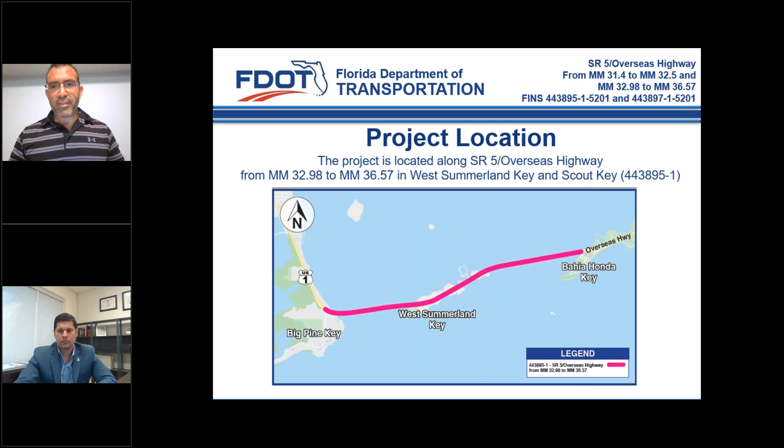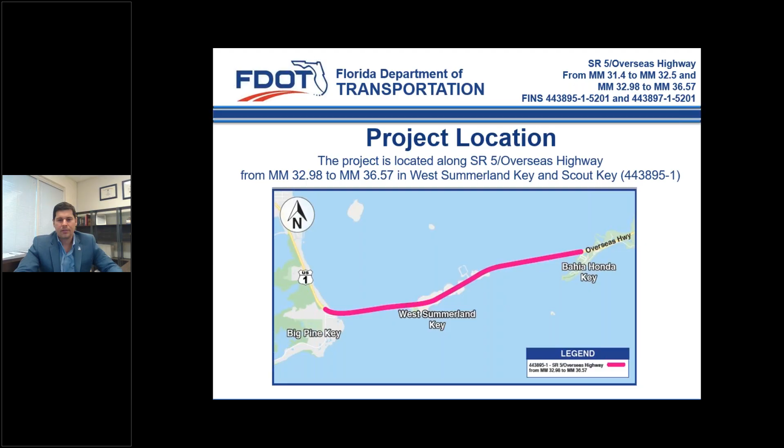As Rodolfo mentioned, this project is along State Road 5, Overseas Highway, from mile marker 32.98 to mile marker 36.57, and is located within West Summerland Key and Scout Key. The project length is 3.4 miles and is composed of 1.9 miles of bridge section and 1.5 miles of roadway section. The Florida Department of Transportation has a duty to prolong the lifespan of the pavement and provide a safe sidewalk path and accessibility for the public.

For this reason, the department is performing a resurfacing, restoration, and rehabilitation project. This project is within Monroe County. As you can see in this slide, it shows a project schedule and the cost.

The production date for the plans is scheduled for September 2021. The letting date is scheduled for February 2022. The construction start is scheduled for June 2022, and it will last 1 year. As a result, the construction will end on June 2023, and the total construction cost is $3.6 million.

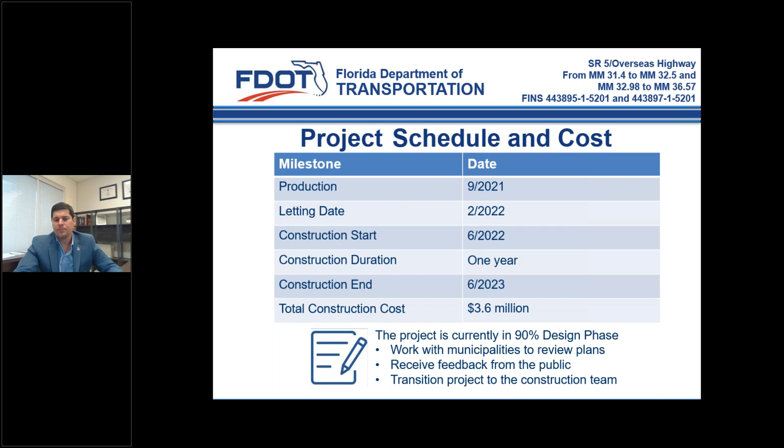As of today, the project is currently at 90% design phase, and we are working closely with the municipalities as well as with FDEP for the Florida Keys Trail, the Heritage Trail, and we're open to receive any feedback from the public. In regards to the scope, the project scope includes the milling and resurfacing of the existing corridor.

We're also going to be upgrading substandard pedestrian ramps and crosswalk markings at mid-block crossings at the boat ramp entrance, which is just east of the Spanish Harbor Channel. We're going to be upgrading substandard guardrail, restoring eroded roadside areas and shoulder drop-offs, installing pedestrian and bicycle bullet railing at the bridge segments, and finally, upgrading pavement markings and substandard signs as per current standards.

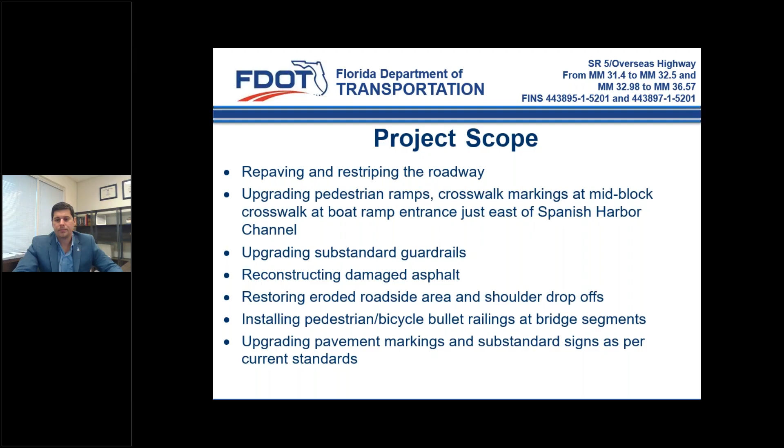What to expect? Well, first of all, there are going to be lane closures. The lane closures are only going to occur during non-peak hours and on non-event days, nights, and weekends. The non-peak hours are for the 4-lane sections between 9 a.m. to 4 p.m. Monday through Friday, and between 9 p.m. to 6 a.m. Sunday through Thursday. The non-peak hours for the 2-lane section are 9:30 p.m. to 5 a.m. Sunday through Thursday.

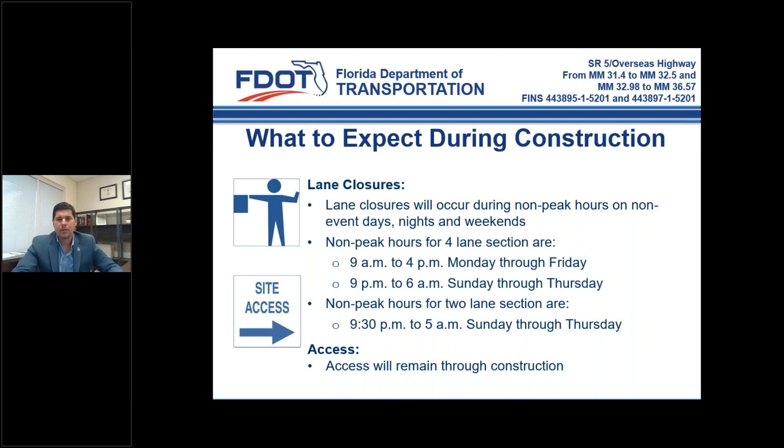We're also going to maintain access throughout construction to all the adjacent properties. What to expect during construction? Bicyclists are going to keep using the Florida Keys Overseas Heritage Trail, as well as pedestrians. The contractor is going to be required to water and sweep the road and the surroundings in order to minimize construction-related dust.

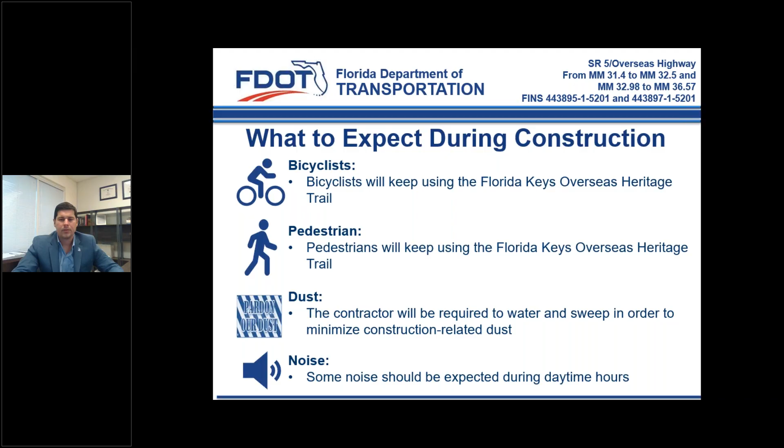And in regards to noise, some noise should be expected during daytime hours. In regards to the maintenance of traffic, or MOT, as I mentioned before, we're going to have some temporary lane closures during off-peak hours. Within the 2-lane segments, the traffic is going to be confined to 1 traffic lane, which will require flagging operations. The Florida Keys Overseas Heritage Trail will be open during repaving and restriping operations. We do not anticipate any detour within the project limits.

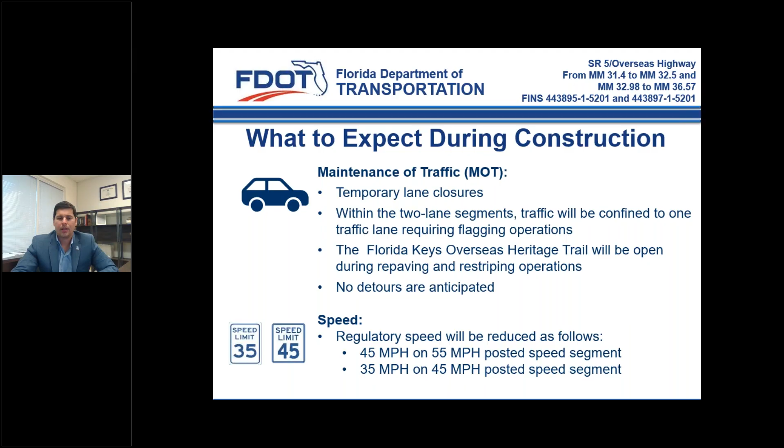In regards to speed, this segment has 2 speed limits. The regulatory speed is going to be reduced as follows: for the 55 miles per hour posted speed segment, it's going to be reduced to 45 miles per hour during construction activities, and for the 45 miles per hour posted speed segment, the speed limit will be reduced to 35 miles per hour.

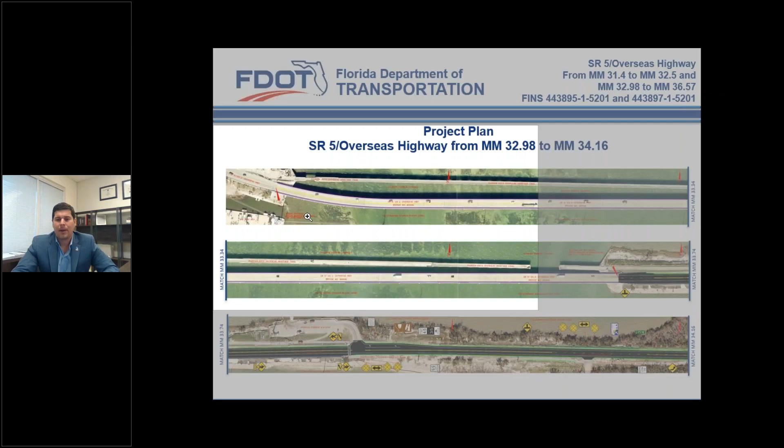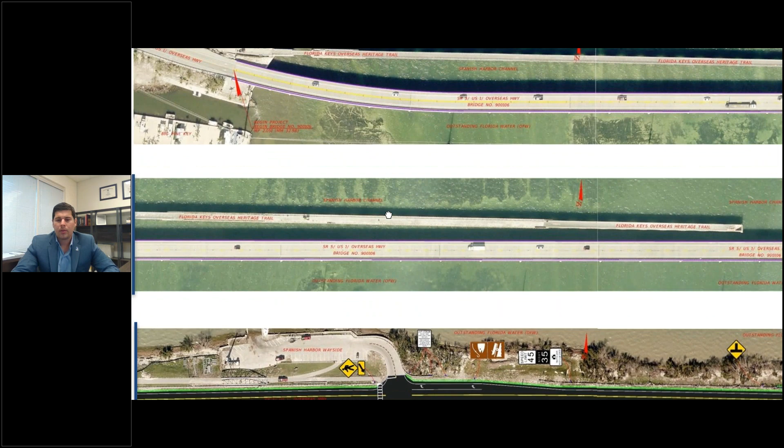As depicted on the top and mid panels, bicycle pedestrian bullet railing is going to be installed along both sides of the bridge, and the signage and pavement markings will be upgraded to current standards. The bottom panel shows that roadway improvements are going to take place at the approaches of the Spanish Harbor wayside, which includes the milling and resurfacing of the pavement and shoulder, the guardrail upgrades, the restoration of eroded side slope, as well as the signing and pavement marking upgrades.

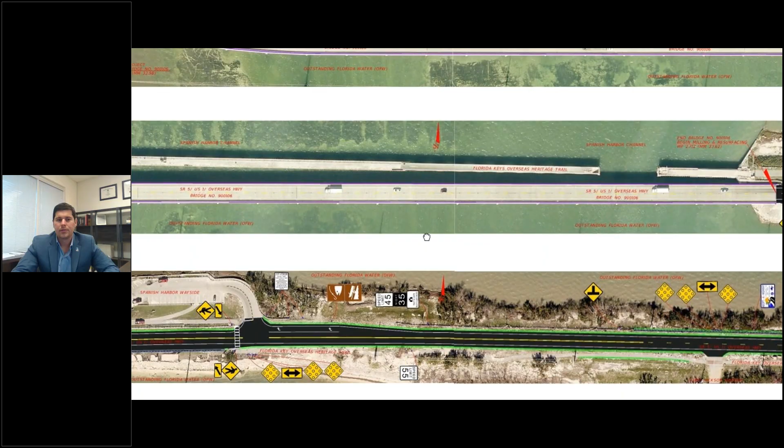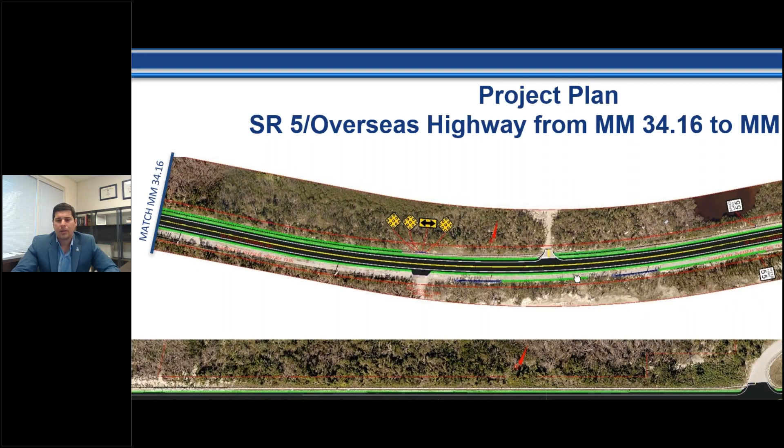Next slide, please. Okay, in this second slide, it shows a segment between mile marker 34.16 to mile marker 35.31. The improvements within this slide consist of milling and resurfacing, guardrail upgrades, restoration of eroded side slopes, as well as signing and pavement marking upgrades.

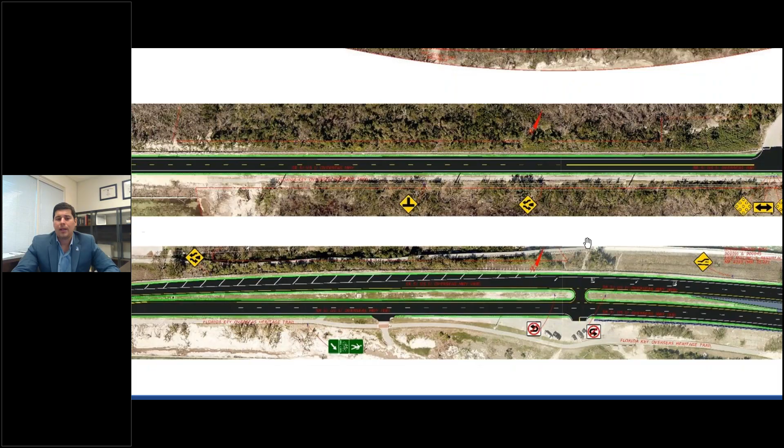The middle and bottom panels show how the road transitions from the 2-lane to a 4-lane segment, and then connects at mile marker 35.22 to bridges 900016 and 900045, which both bridges are parallel and run over the Bahia Honda Channel.

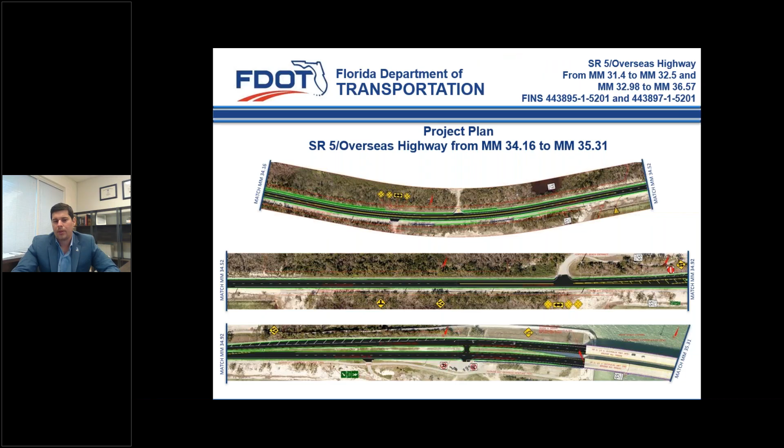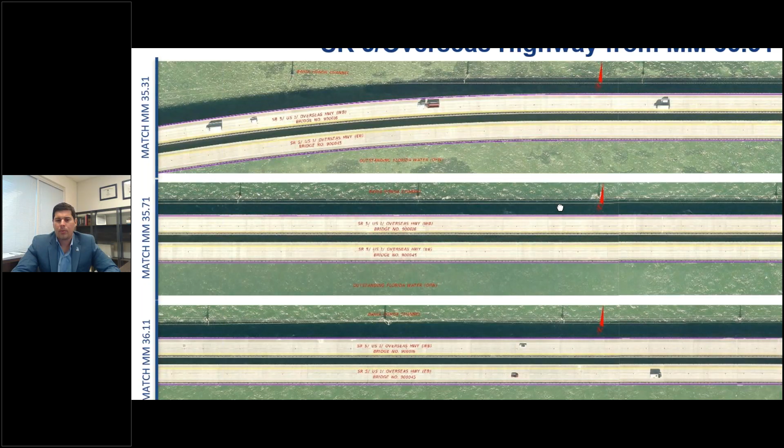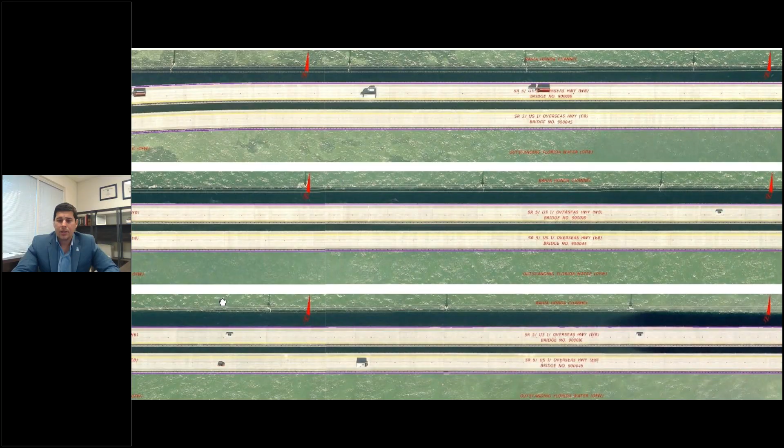In this slide, we can observe the segment between mile marker 35.31 to mile marker 36.57, which shows again the extension of bridges 900016 and 900045, which run over the Bahia Honda Channel. Similar to the first bridge, bicycle and pedestrian bullet railing will be installed, but this time it's only going to be installed along the right side of each bridge. In addition, the signage and pavement markings are going to be also upgraded to current standard. The project ends at mile marker 36.57, where the dual bridges end.

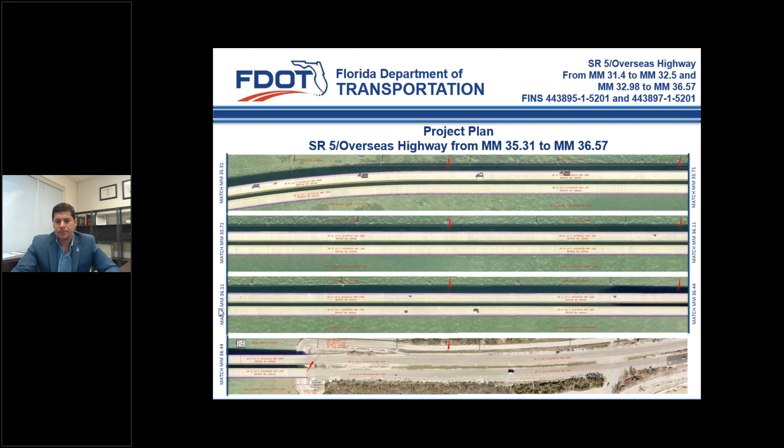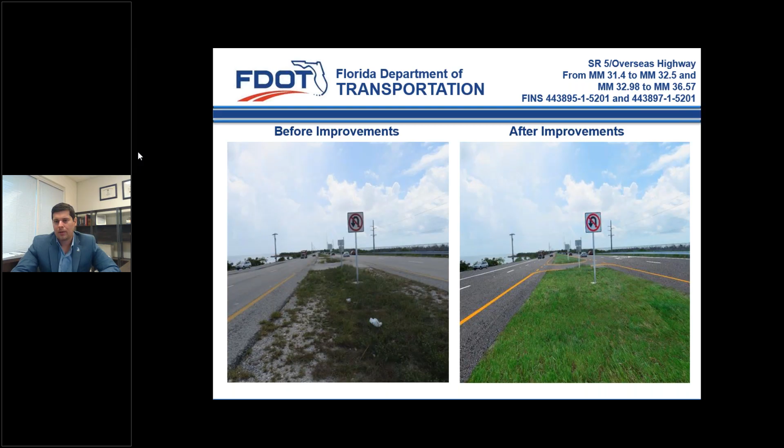With this, I'm done with the first project, and now Raymond Valido will present the second segment.

Thank you. Thank you, Hans. Ray will talk about the upcoming project. This one is located in Big Pine Key. Ray, you're muted. Can't hear you. Can you hear me? Yeah, perfect. You're good. I apologize about that.

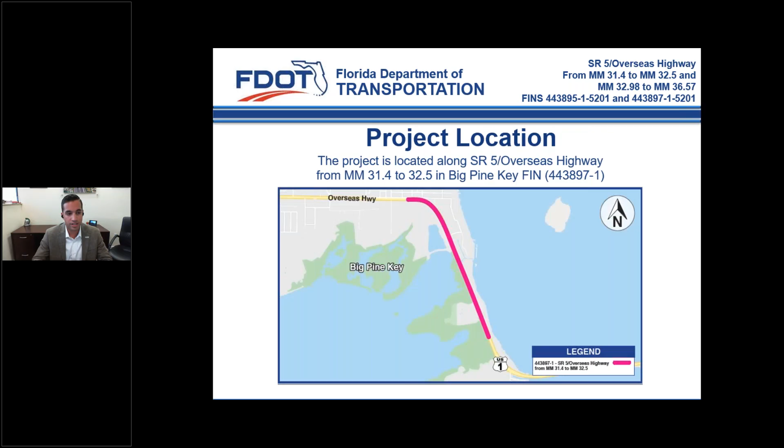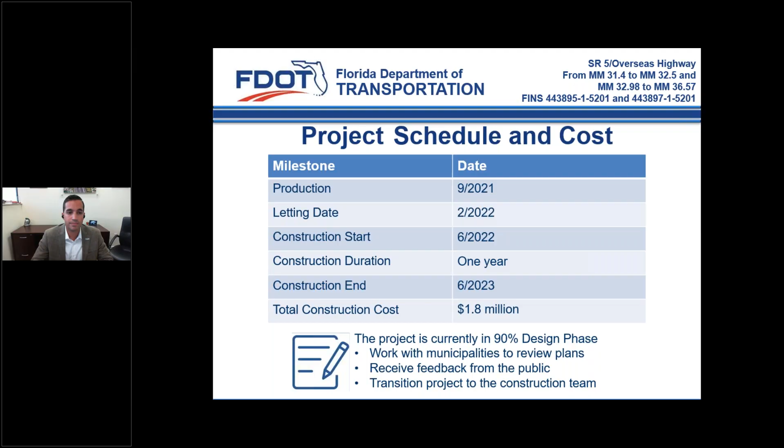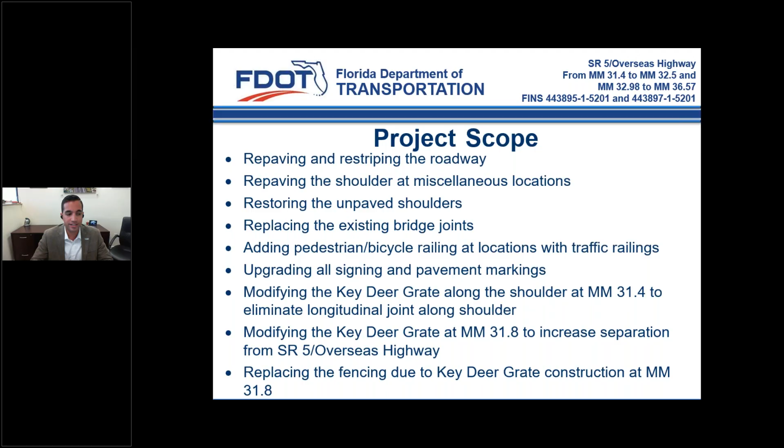We understand the importance of the Florida key deer and the sensitivity of the Florida key deer within the Florida Keys. As such, we wanted to further elaborate on some of the key deer grate improvements that we have.

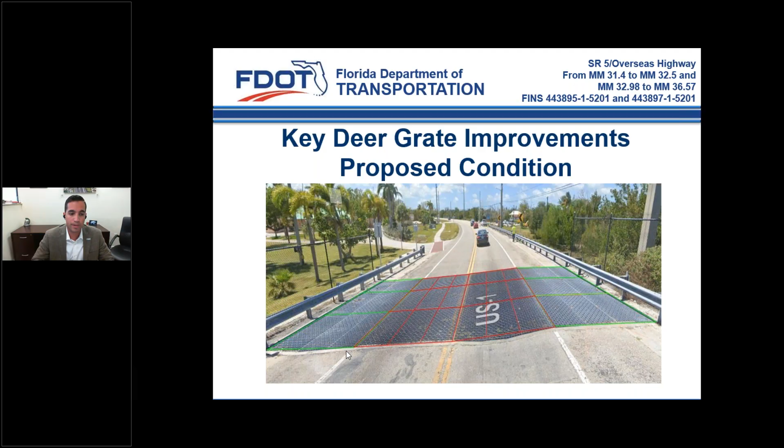Our proposed design eliminates the longitudinal joints along the shoulder. I bring your attention to the new green shapes on screen. If you recall the previous slide, now we have one large green rectangle, whereas before those green rectangles used to be comprised of 3 individual panels. Our proposed design removes those panels and replaces them with a larger panel of the same dimensions as the previous ones, from hole opening size, allowing us to eliminate the longitudinal joints along the shoulder. Now we no longer have those parallel joints running along the shoulder, which should improve walkability and access for both bicyclists and pedestrians.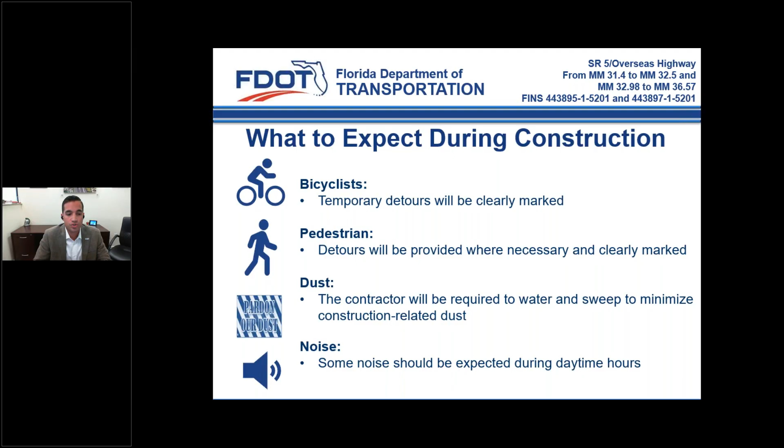The contractor will be required to water and sweep to minimize construction-related dust. Some noise should be expected during daytime hours.

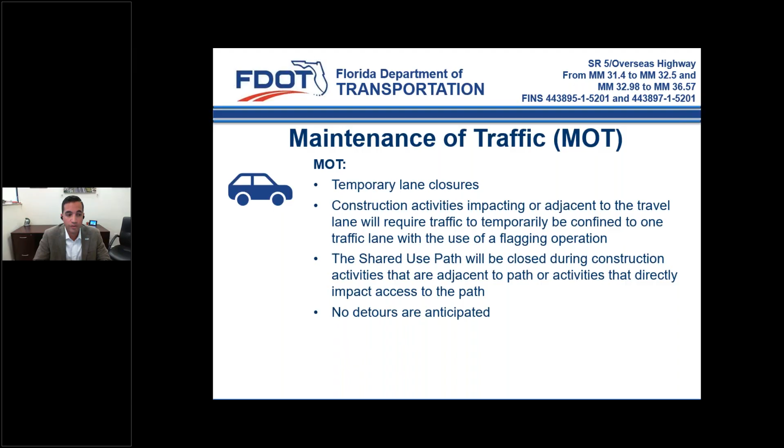From the maintenance of traffic standpoint, we will have temporary lane closures. Construction activities that impact or are adjacent to the travel lane will require traffic to temporarily be confined to one traffic lane with the use of a flagging operation. The shared use path, as previously mentioned, may be closed during construction activities that are adjacent to or directly impact the path. However, alternate detours for the shared use path will be provided. No vehicular detours are anticipated for this particular project.

Key deer safety measures: we understand the sensitivity and importance of key deer. At the key deer grate at mile marker 31.8, the two travel lanes will be maintained at all times during construction at this location. We're doing so by shifting the travel lanes away from the key deer grate and providing a temporary barrier wall to shield the work area. In addition, temporary fencing will be placed at the key deer grate construction at mile marker 31.8 during construction to keep key deer from coming onto the roadway. Regulatory speed will be maintained at 45 miles per hour during the day and 35 miles per hour during the night.

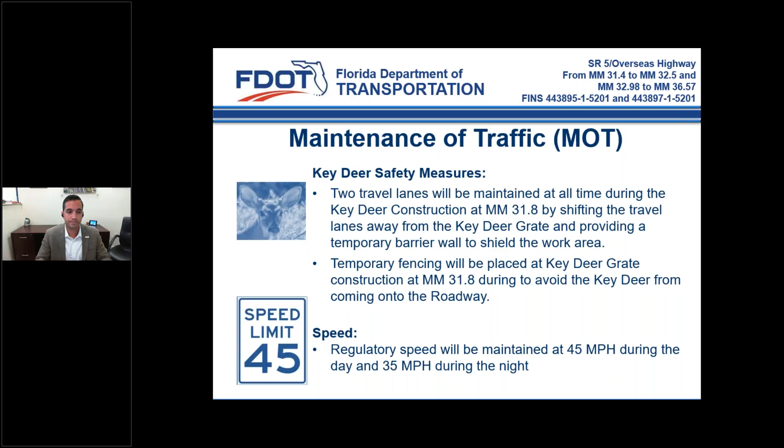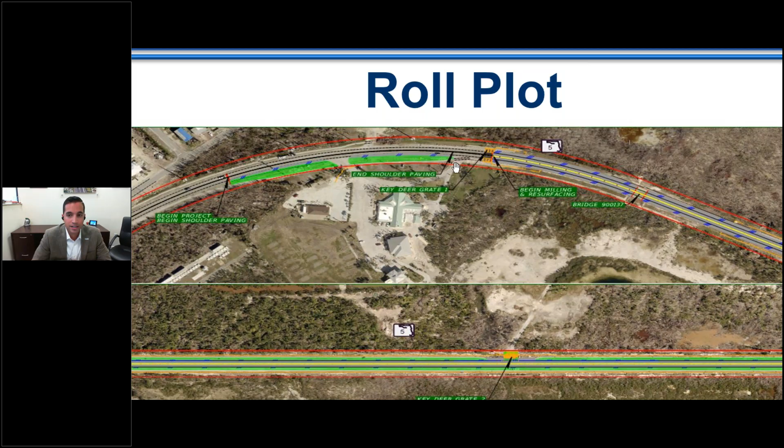To walk through the roll plot, zooming into the top pane, this is the beginning of the project. That green building where the cursor is at is St. Peter's Church. In this area, we begin our project and begin shoulder paving in the northbound direction, providing an 8-foot paved shoulder in front of St. Peter's Church. I bring your attention to key deer grate number 1, represented by that label and those orange lines. This is where we're replacing the panels on the shoulder, eliminating the longitudinal joints. Continuing right in the northbound direction, we begin milling and resurfacing directly after key deer grate number 1, then bridge number 900137.

At bridge 900137, we're replacing the existing expansion joints and placing bicycle pedestrian bullet railing. Continuing, we have milling or resurfacing.

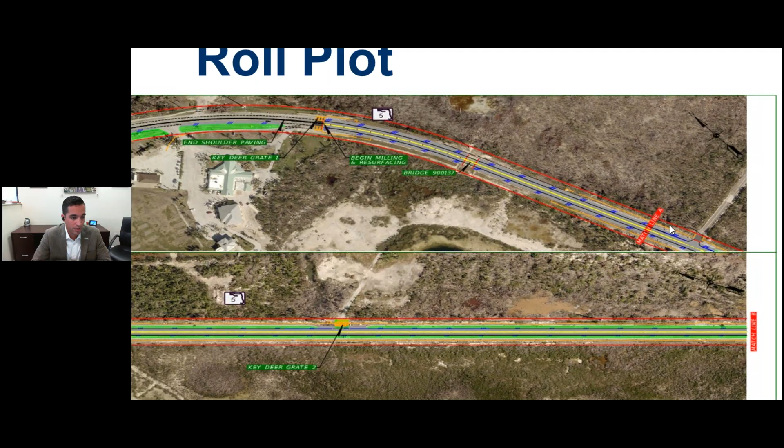Now in the second pane, working our way all the way to the left, we continue the milling and resurfacing operations, then pass Beach Drive and get to key deer grate number 2, which is at mile marker 31.8. That services a private driveway. This is a key deer grate that we are shifting away from the roadway towards the right-of-way, and you can see that it will remain within DOT right-of-way. We continue towards the right and maintain the milling, resurfacing, and shoulder erosion corrections throughout the corridor.

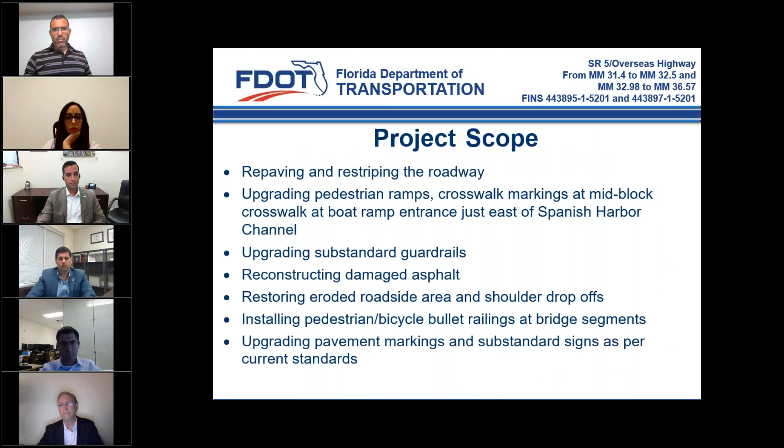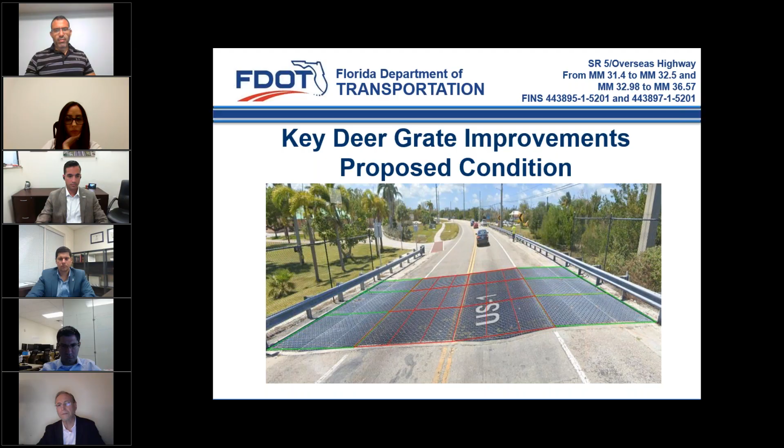Rodolfo, can you scroll to the slide that shows the grates? That way it's a better visual so we can understand the question. So we've got grate one, grate 2, the other one, okay, there we go. You've got those long paths, which is good. And so on this one, where the person's private driveway is, can those also be turned the other way and be on the long axis instead of having so many seams, like the same thing but the other way for this driveway?

Yeah, see how they're going up and down towards the driveway, all those seams? Is it possible that you can turn them the other way? Because one of the weak or bad parts of the grates you're using right now is that the seam itself is a lot of material. There are two pieces of metal sitting together, which makes it an easier access point for the deer to walk over those seams. So there are more seams being presented to the deer trying to enter US 1. If they were turned the other way, there would be less.

And I guess also, since you're doing this project, is there any opportunity to look at potentially changing this deer grate material to one that has slightly larger holes, to help decrease the chance of the bigger bucks, which are now documented as not having a whole lot of trouble walking over this grate, which does work very well except for those larger bucks?

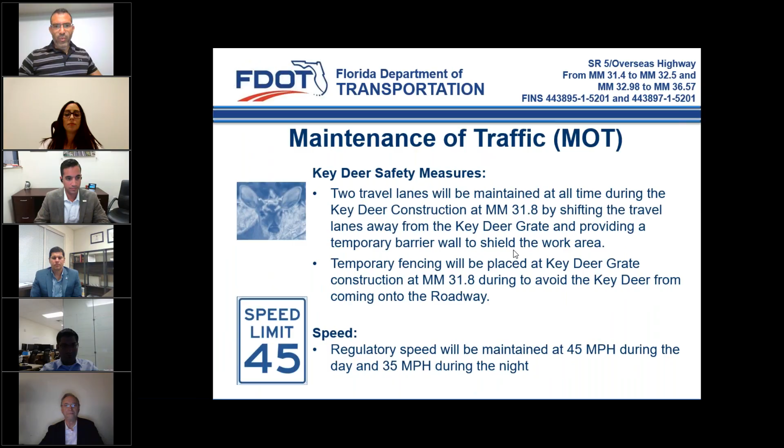This question comes from Priscilla Clogas. She wants to know, will these improvements happen during off-peak hours? Let me pull up what to expect here. This is helpful right here. Team, again, will these improvements happen during off-peak hours? I guess this could go for anyone on the team. I'd like to answer this one.

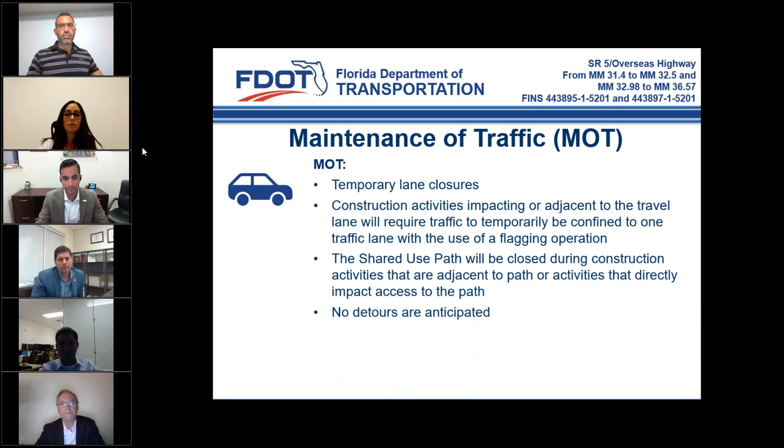Raymond? Sure, thank you for your question. Yes, as we stated in the beginning of the presentation, the improvements and construction activities are going to take place only during off-peak hours, and this applies to both segments. There's pretty much a good understanding of the times. Thank you, Hans.

Once again, if you'd like to share any comments or questions, you can submit it. We have another one from Ms. Priscilla. She wants to know, we have a major issue with the traffic light on Big Pine Key with traffic congestion on this roadway that backs up to the bridge at times. Team?

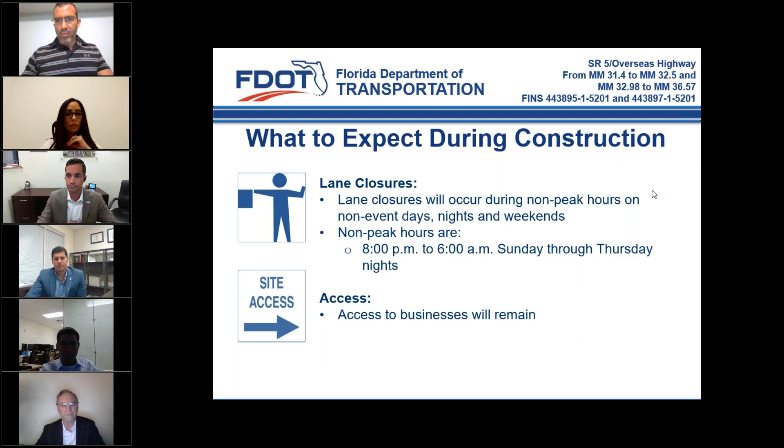You have a roll plot or where? Yeah, I would have to pull up, if you give me a second I can pull up Google Earth, or just pull up the roll plot so we can see where. The roll plot that won't show the limits, right? It's a signalized intersection. No, it's further south.

Give me a second, let's see if we can pull up Google Earth, everyone, and we could pull up Big Pine Key. Ray, is it within your limits? No, it's approximately, and I'm measuring right now, about 1 mile away, 1 mile in the southbound direction. It's Chapman Street, Deer Boulevard, Wilder Road.

So with that said, team, then I can go ahead and send that to traffic operations. That was Chapman, right, Ray? Yes sir, Chapman Street. Ms. Priscilla, we will send your concern to the traffic operations office, and they will look further into the concern or question you've expressed. The light is outside of the project, all right? Yep, wonderful. Thank you, Fabiana.